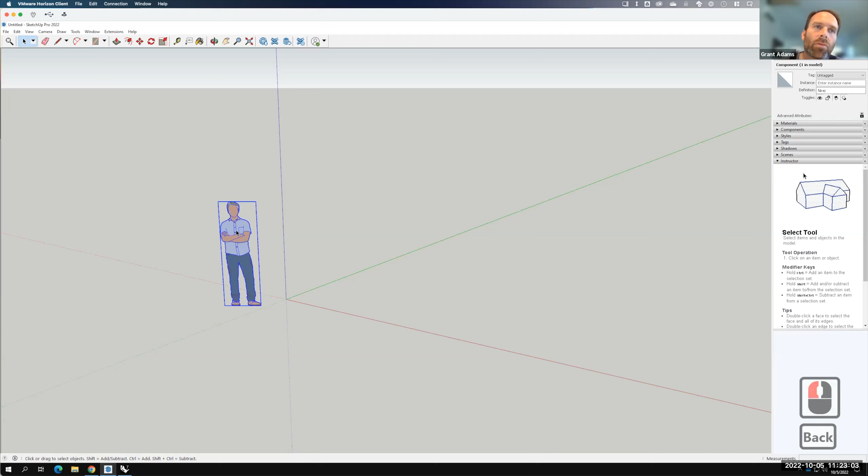In the meantime, I went ahead and opened up the SketchUp Pro app on the remote desktop. Here it is, and we're going to get our terrain information from SketchUp Pro. I'm going to go ahead and delete the little person here. Oh sorry, I have to right click and say erase to get rid of them. Then I'll go up to the file menu and choose geolocation, add location. We could get this information from a variety of sources, but for our purposes, we're getting it from SketchUp because it's an easy source and easy for us to get. But any kind of GIS data set we could use and do the same sort of thing with.

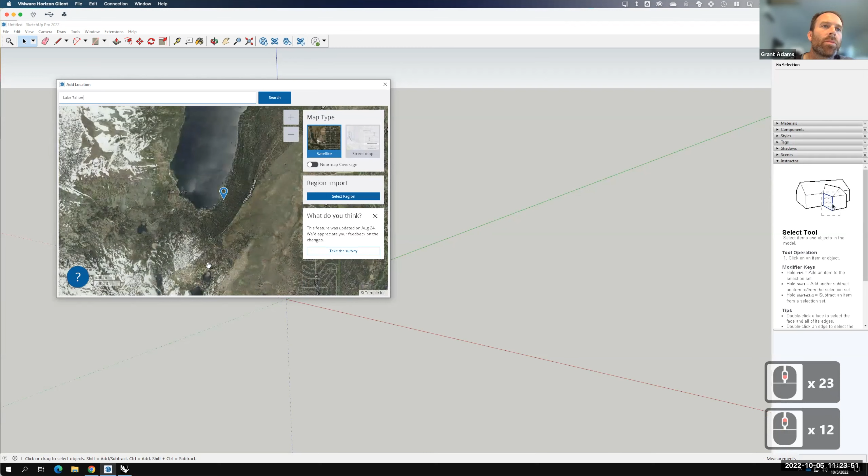So I'm going to go back to Lake Tahoe again. Let's zoom out a little bit. And that is definitely not Lake Tahoe. But let's try it again. There we go. So if we were to zoom in on a particular area, let's say that I like this area right here. At a certain zoom level, I can choose this select region button. When I select that region, it's going to let me select a piece of land. So let's say that I want to pick that piece of land.

I'm going to switch to this digital globe, then click on import. And there it is. To see it in SketchUp, I'll go to File, then Geolocation, Show Terrain, and that'll give me the piece of terrain. Sorry, I need to middle mouse to orbit here.

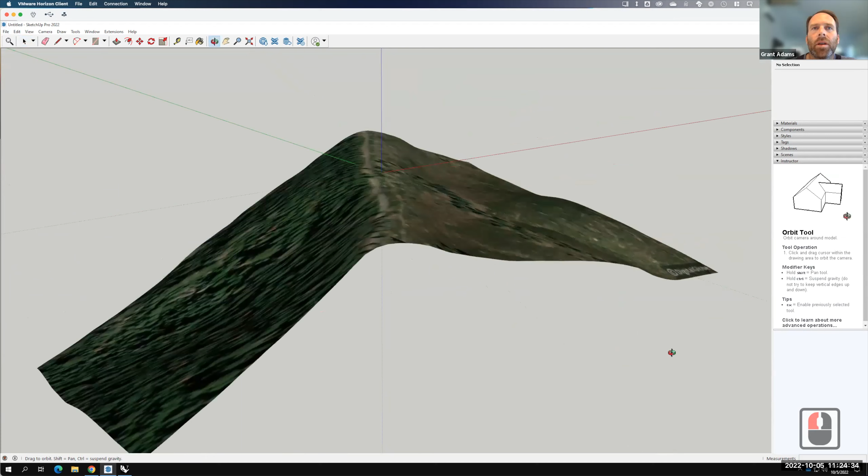So at this point, I want to save this into a Rhino compatible format. I'll go to File and then Save As, and I'm going to go backwards in SketchUp. I want to go back to about 2018. Then I'll give this a name and put it into our folder for today. There's Tahoe 3. Again, 2018 file. I'll go ahead and click on Save.

Why did you change to 2018? Because I'm not sure that Rhino, when you get to the new versions, it's possible that Rhino hasn't updated to read SketchUp 2022. I know that it reads 2018 and we're not losing any data by doing that, so I just back save it there.

We could, let's do it just as an experiment. We could save it as the most current version and see if it comes in. It's just a matter of which has been updated most recently. So we'll save this as its current version and see in Rhino. Maybe it's been updated, maybe Rhino's been updated. Part of it is we're working on the lab computer, so we're not always in the exact current version of a piece of software. So let me open a brand new Rhino file.

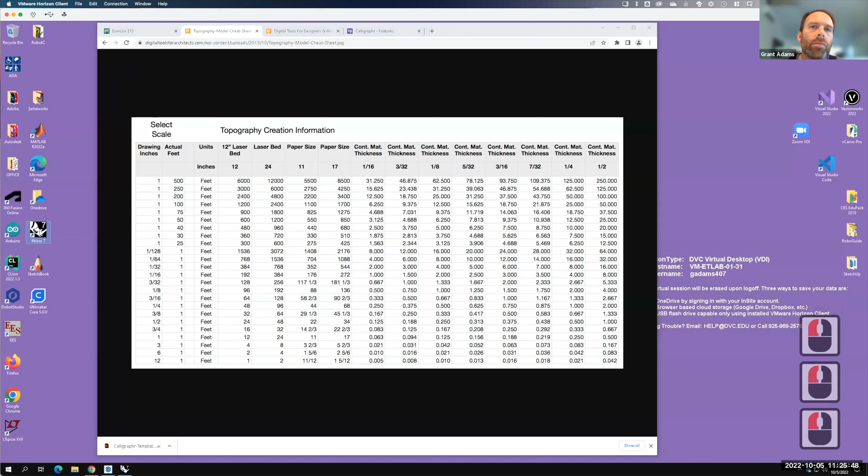Let's minimize SketchUp here. I'm going to go to new, and we're going to do a large object inches template. I'm choosing that because that matches the units that SketchUp was in. There we go. I'll go up to the file menu and choose file and then import.

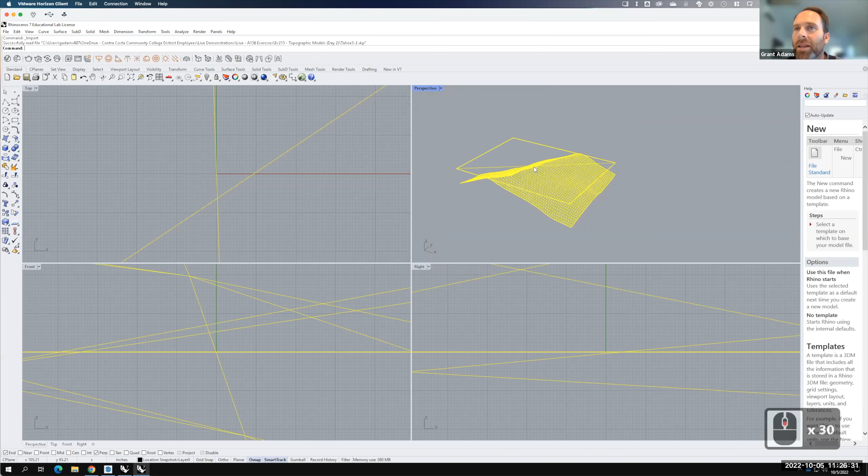And like I said, we're going to try out that Tahoe 3-2. This was the most current SketchUp file. Let's open it and see if it loads it. It loaded it. So I guess we can use just the generic SketchUp file, we don't have to back save it. That's good, that must mean the Rhino file has been updated fairly recently.

So like you guys can see, I'm moving a little bit faster today through these steps because we've already done it a couple times. So let's go ahead and switch ourselves into our shaded mode. There we are in our shaded mode, and I'm going to organize my layers.

So let's create a SketchUp layer. I'll call that SketchUp. And then I'm going to have an SK flat, and then another sublayer for SK terrain.

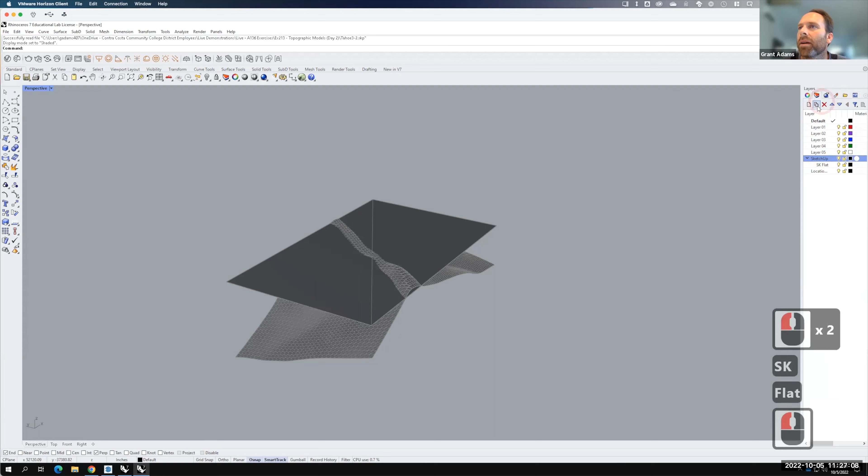I'll take the mesh file that's my terrain and put it on the SK terrain layer. I'll take the flat file and put it on the flat layer. That's just simply right-clicking on the, selecting the object, then right-clicking on the layer. That'll let me turn off the flat file and work just with this piece.

So at this point, I need to convert this mesh into a nice, clean NURBS surface. This is where those contours come in. I'm going to rename layer 1 here to be Contour X. So there's Contour X. Let's make it the active layer. I've moved my check mark down so it's listed as active.

In order to snap to the mesh, I need to turn on Vertex Snap. That'll let me snap to this end. And then we'll go ahead and use the contour command. I'll go up to curve, curve from objects, and then contour. There it is. I'll choose that point right there.

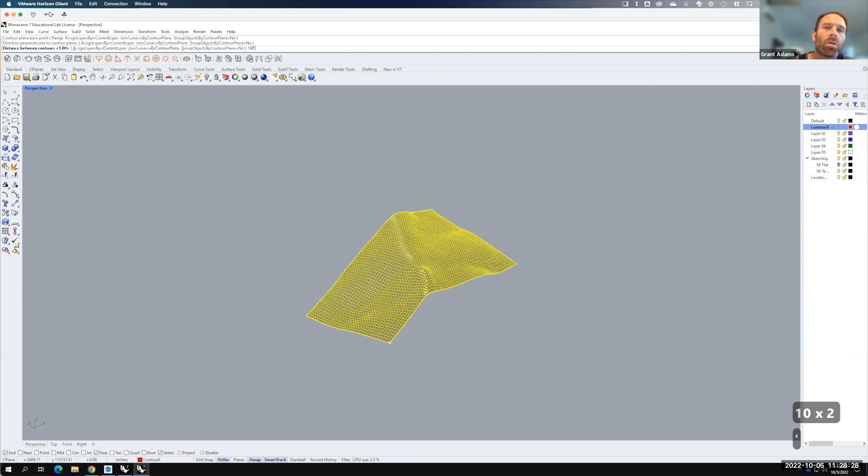And since this is Contour X, I'll turn on ortho and we'll go right in the X direction, again not snapping to anything. Then I need to guess what the distance should be. I always try 100 feet to start, but we'll see if that's too close together or too far apart. It's a little far apart. So let me undo here, and we'll do it again, contour, and let's try it at 50 feet.

It's close enough. Then I need to contour in the Y direction. So I'll double click on layer 2 here and rename that to Contour Y.

I'll make that the active layer, and I'm going to contour the mesh. Remember, if I were to contour the contour X's, if I went in and said contour...

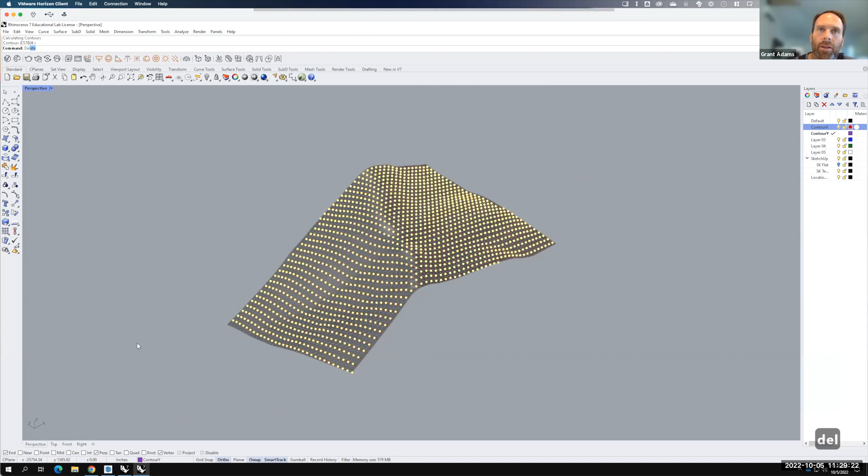When I did the contour, I get a bunch of points. Well, we're not interested in the points, so let me get rid of those. We'll come back. We want to make sure that I'm contouring the mesh right there.

I'll type contour, or do curve, curve from objects, contour. Pick that same point. We're going in the Y direction. We'll do our same distances. And there's my next set.

So at this point, I can turn off the SketchUp layers altogether, and I'm left with what will ultimately be a curved network. So it's a network of curves that I can convert into a surface.

As we've experienced before, the ends need to be trimmed to be nice and even. So we'll go in and we'll do some trimming. I'll select that, type trim, or go to edit and then trim. Get rid of all our lines right there.

Zoom in, make sure I got them all. Yep. And then let me get rid of this line. And then we'll trim this section.

And we want to make sure we got them all. Yep, we did. Hit enter to finish and escape. And then I'll go ahead and delete that section. We'll use this line and we will trim again.

There we go. Oops, I missed that last little piece. There we go. And then I want to delete that segment. And I'm left with this last piece over here on the right.

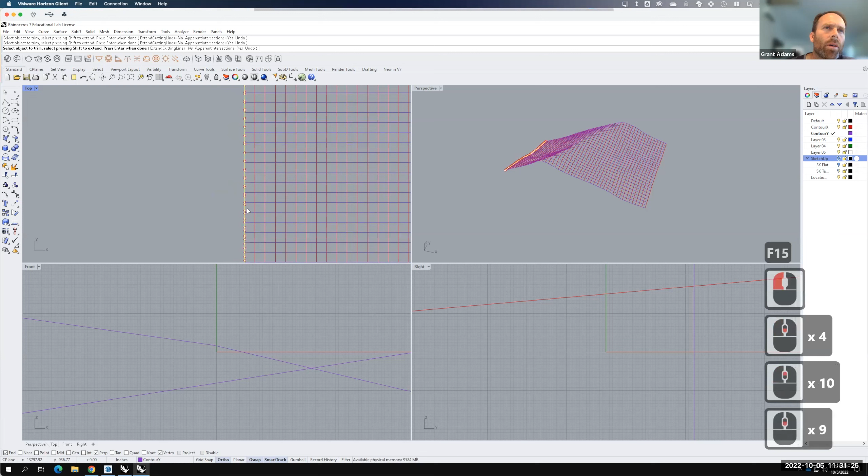All right, and then let's see if we can get them all this way. Missed a couple. And I'm pretty sure I got them all. Perfect. So I'll hit enter to finish.

And now I have a nice orthogonal grid that I can use for my curve network. So this is always a good place to save. So I'll go to File and then Save, and we'll make sure we're saving this.

This was Tahoe 3, so let's put it in its folder for today. We'll call this Tahoe 3. I'll go ahead and click on Save.

And there it is. Now it's time to convert this over into an actual NURBS surface. So let's use our layer 3 here. Let's call that one Terrain. We'll make it active. And then we're going to go ahead and do our curved network.

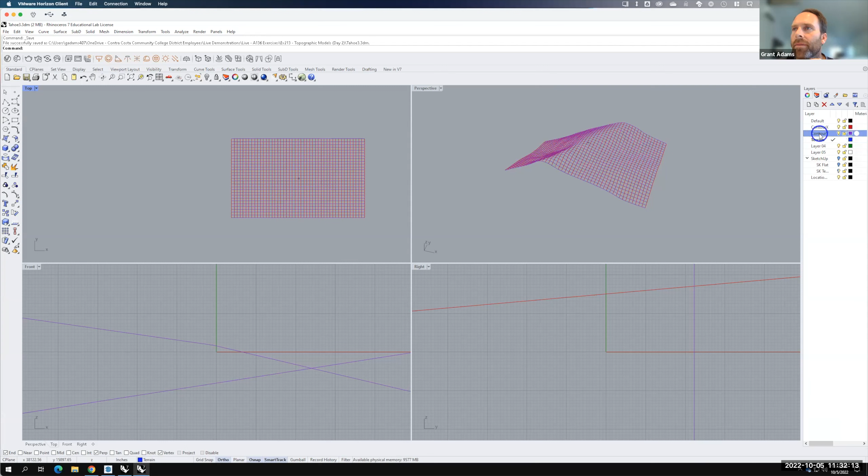So in this scenario, I'm going to, again, just for ease of getting it done during lecture live, select all of the contours in the Y direction, and add, by holding down the Shift key, the 2 contours at the ends, there and there. And then I'll go up to Surface, Curve Network, or I'll type in Network SRF into the command line.

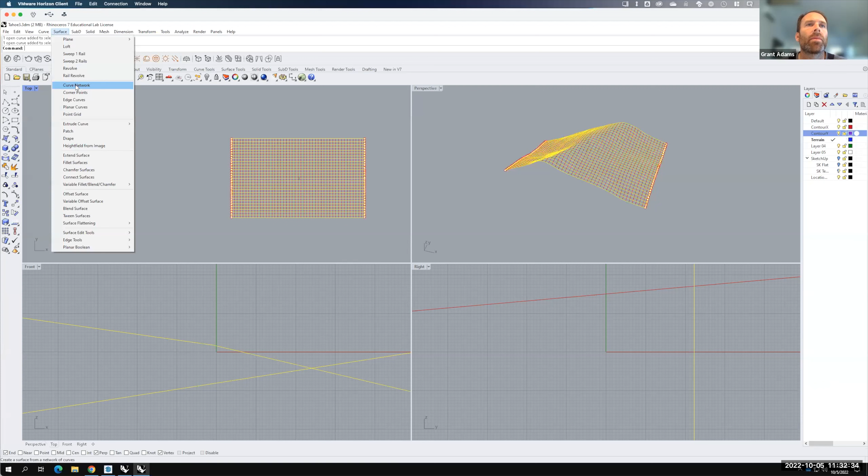And this is the patience game, so we have to be a little bit patient here. We'll wait for it to show up in all the views. And there we go. We'll go ahead and say OK, and we'll give it some time.

And even though this takes time, this is why I always do it live, so that you can see that this is normal.

So I think it's possible that it's done. Let's click off and see. Yep, it's done. You go ahead and click on the surface.

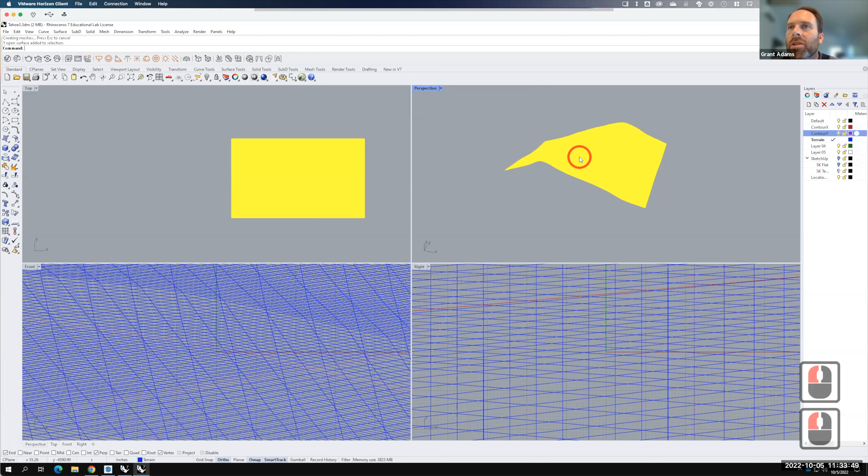And when I do that, we get the big yellow block. And now it's time for a rebuild of the surface. So with the surface selected, I'll go ahead and type in rebuild, or go to edit and then rebuild. And I'm going to rebuild this at 100 by 100.

And I'll go ahead and say OK. Now I have a really nice surface to start working with. It's reasonably smooth. We could turn off the contour X and Y, and now we can see that nice surface.

So that's perfect. So we have our NURBS surface, and it's now time to start thinking about it at a particular scale. So if you remember last class, and actually I'm going to save this while we have it done, I pulled up this cheat sheet that talks about creating a topography model.

And we're creating our model at 11 by 17. And so I have to understand what scale I want to create this model at. Now recognize that, of course, sometimes you're given a scale.

I want to see a model at 1 to 100, or I want to see a model at a 1/16 inch equals a foot. So you could pick a particular scale, or maybe it's dictated for you.

I believe this terrain's a little bit smaller, so it's probably going to be like the 1 to 200 feet. If that's the case, it would be 2,200 feet by 3,400 feet. That would be my rectangle. So let's give it a shot.

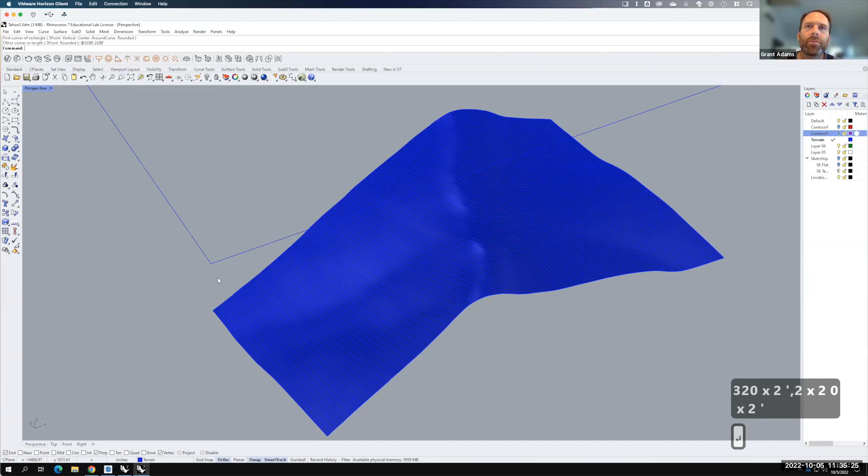So we'll create a rectangle at 3,200 feet, comma 2,200 feet. Enter, and there it is. If I look at this in the top view, we can see that, yeah, it's actually still too big. I picked a much smaller piece of terrain this time.

So let's delete that one. Let's go back to our file here, and let's do it at 1 to 50. Let's try that. This would be 850 by 550.

So we'll do a new rectangle at 850 feet, comma, sorry, I have to put the feet in, 850 feet, comma, 550 feet, enter. And there's that size. That size would work. So in this example, I can use this size.

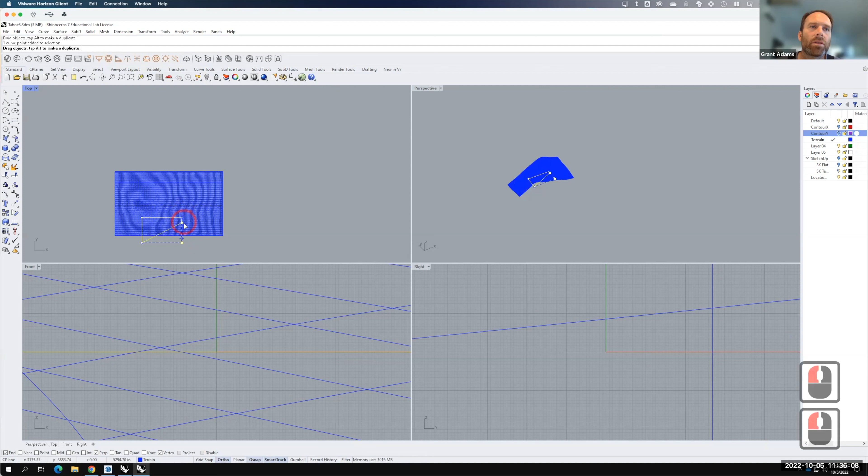And now I want to move this so that it's over the terrain. And as I'm starting to think about the terrain, I may want to switch this into shaded mode so I can kind of see where that ridge is and make sure that I'm falling on the ridge nicely. That looks pretty good. Now I need to have that rectangle that's flat projected onto this surface so that I can do a trim on the surface.

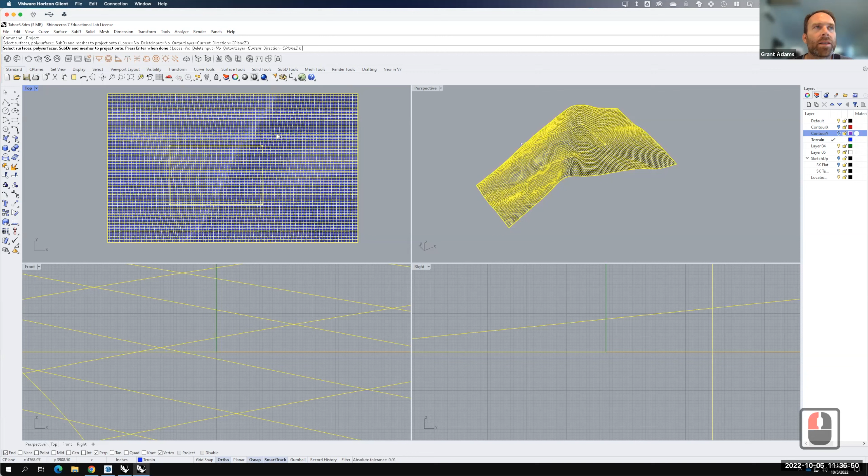So in the top view, and it's specifically in the top view, I'm going to select the curve, and then I'll do a curve from objects, project. It's going to ask me to select the polysurface or a surface to project onto. That would be my terrain right there. I'll press enter, and again I'm doing that in the top view, and it then creates the outline of my surface right there. So at this point we can go ahead and type trim, or go to edit and then trim, and we can get rid of the rest of the surface that we don't need.

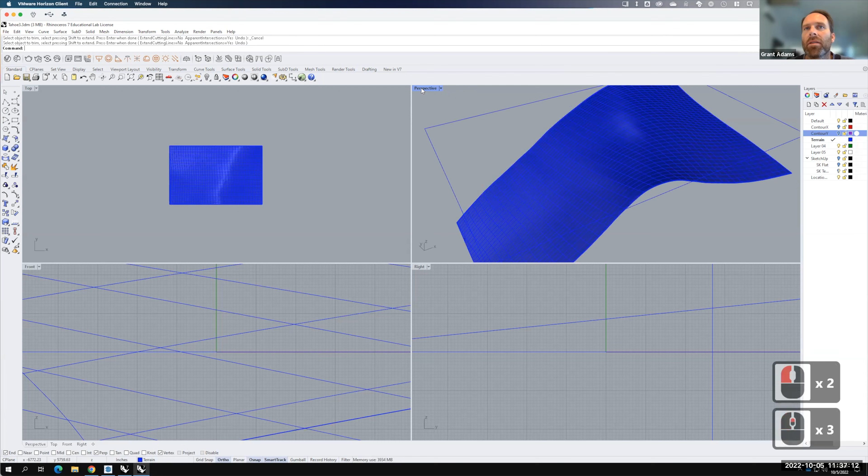Now, at 1 to 50 scale, this piece of terrain will end up being 17 inches by 11 inches. So it's a great piece of terrain there. It's actually pretty steep, so there's going to be a lot of steps on it. I'm glad I'm not actually doing all the steps on this in front of you today. And so now that we have this and it's scaled, let's save it.

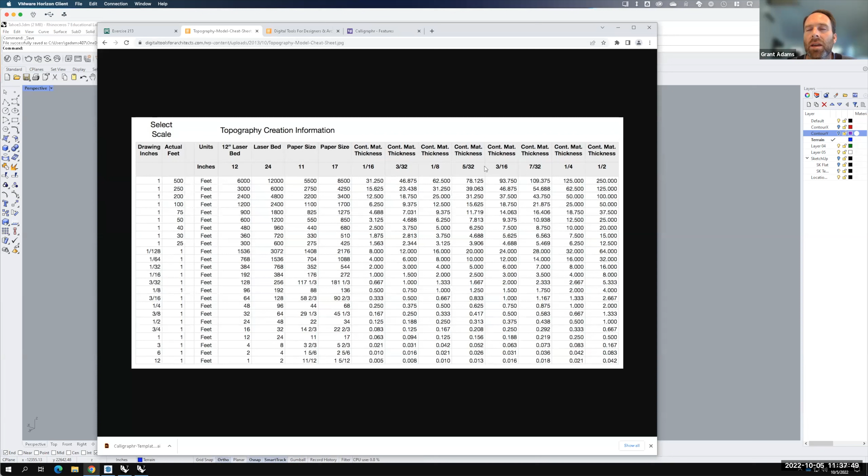But we have to start thinking about what intervals we're going to cut this up into pieces of cardboard. So we need to go back to that topography creation cheat sheet, this one, and we have to know the thickness of our material. So we've been using the 5/32 inch material. That's a standard cardboard size.

So at 5/32 of an inch, we're going to come to 1 to 50 scale. We'll come over here, and there it is at 5/32 of an inch. It's 7.813 feet. That's going to be 7.813.

So when I come here, I can go ahead and type in contour, enter. My base point is going to be down here at the bottom, but I need my contour to be going straight up and down in the Z direction. So let's back out in either the front or the right side view so that we're going straight up and down, and it's going to be 7.813 feet. I'll go ahead and hit enter.

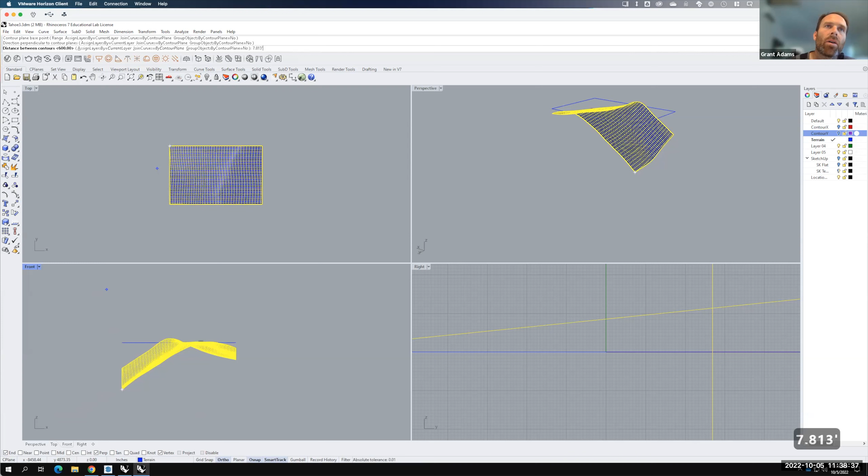And it will then divide up my piece of terrain. So like I said, this was a particularly steep piece of terrain, so there's going to be a lot of steps as part of it because it's a really steep piece of terrain.

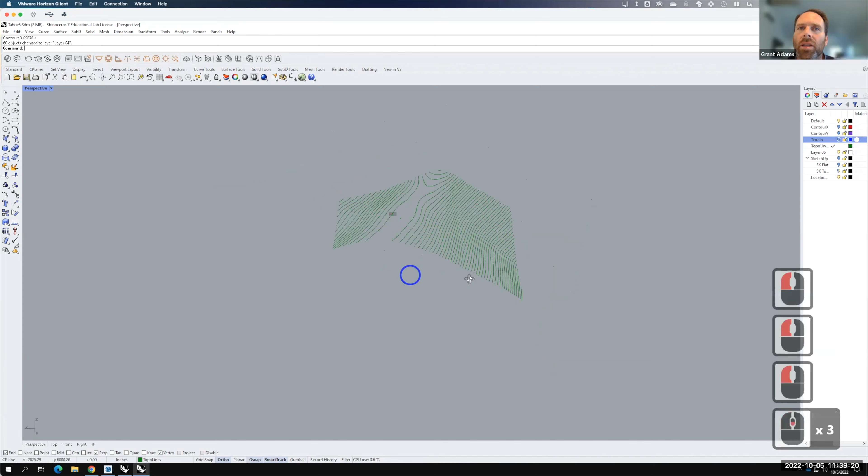So I have that established, and actually I should have put those on their own layer. Let's put them over here on layer 4. Let me change object layer. Let's rename layer 4, we'll call this contours. Let's call this topo lines. There we go. So I could actually make that active and turn off the terrain altogether, and we'd be left with just our topo lines. Now remember, that 7.813 feet is because we're at 1 to 50 scale.

So when we scale this down and eventually cut it out on a laser cutter or have the file, each one of these steps will be the thickness of a piece of cardboard. So now it's time to actually start drawing the sides. And as I did last class, there's two different methods for doing that. The first one would be to create a series of points. So I'll use the multiple points tool, and I'll create a point on the end of each one of these lines.

After I've created all those points, I'll select those points by typing SELPT to select point. It'll select all the points for me. I could also go through and hold shift and select them all, or draw a box and select them all - just different methods.

And then we'll do a rotate 3D. So I'm going to go to transform, rotate 3D. I'll use the bottom point, and I'll use my axes, in this case the y-axis, to fold all of these points down. And there they are.

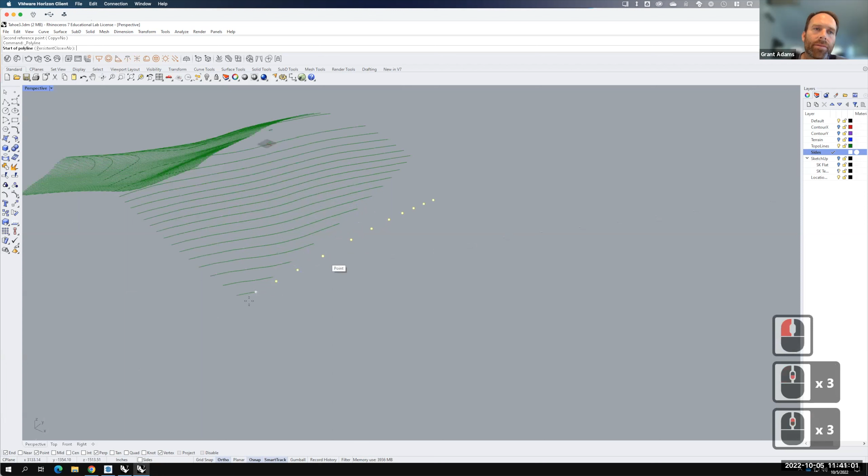Now I can go ahead on a new layer, we'll call this layer 5, sides. I can use my polyline tool and start to draw. I need to make sure I'm snapping to points here, and I can start to draw the steps. There's my first point. We'll come over - there's my snap to perpendicular. I do have my perpendicular snap on, so I'm using smart tracking to get those perpendicular lines. And then I'm drawing each one of these steps.

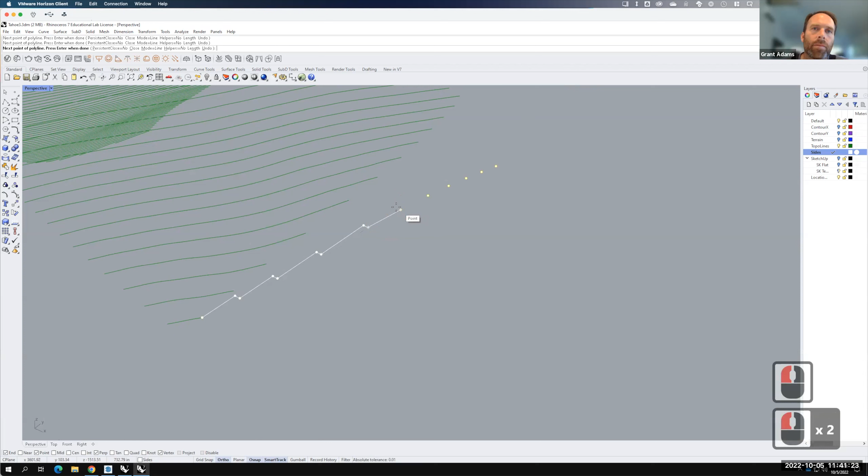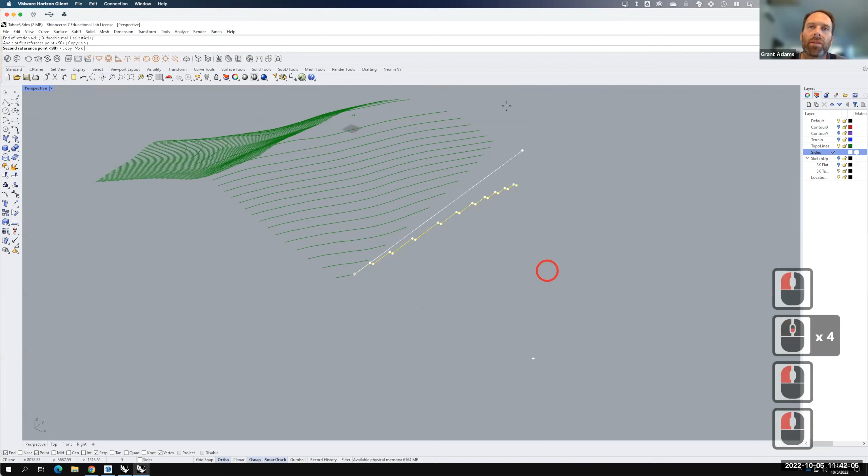There it is. And we'll do that rotate 3D again. So I'll go to transform and then rotate 3D. Start at the same base point, same axis of rotation, and we'll fold it from being flat to being up vertically. And now I have my steps vertical. So that's one way of doing it.

The other way of doing it, and I talked about this last time, is to change the drawing plane, the C-plane, which is represented by our little grid here, into being vertical so that you can actually draw just on the side as we're creating those steps.

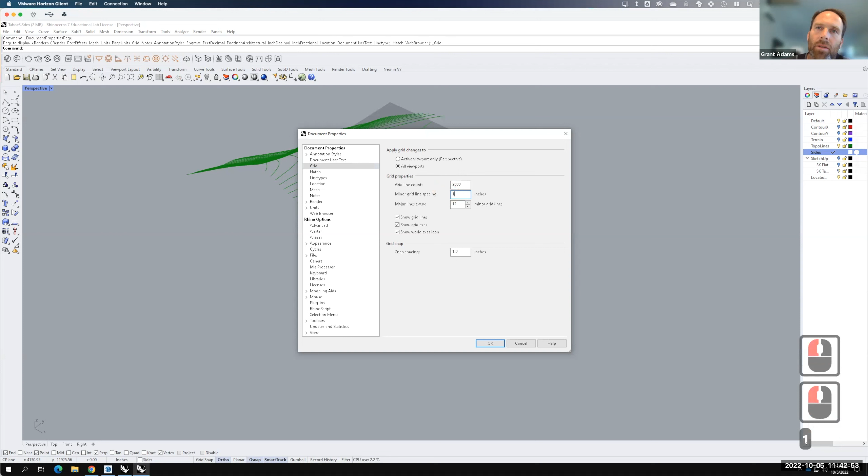So first thing I tend to do is make the grid much bigger. Let's go down here where it says Grid Snap. I'll right click on it and go to Settings. You can also access this by going to the Tools menu and then Options. Under Grid, I'm going to say we want 2,000 lines. We want our minor grids to be every 12 inches, so every foot. And we want our major grids every, let's say, 10 minor grids. And then we'll go ahead and say OK.

And when I do that, you can see that our grid just got a lot bigger. Now that it's so much bigger, we can use that to visualize our drawing plane. Right now it's flat. We're going to change that C-plane so it's on the side of this - actually, I'm going to do this side over here.

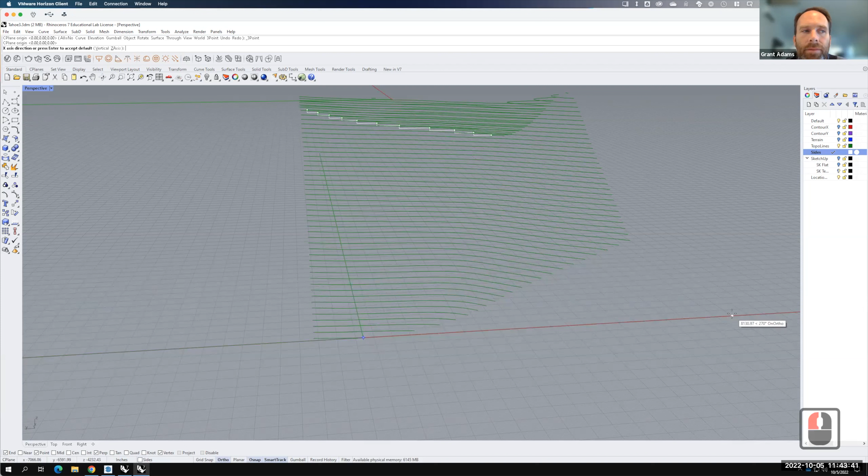So what I'll do is come up to the little triangle next to where it says perspective, and go to set C-plane 3 points. I'll pick the lowest most point right there, then pick what I want my x-axis to be - there it is. Now I want to be going straight up and down, but I can't do that in the perspective view, so I have to come back to one of these front or side views so I can go straight up and down. And now in the perspective view, my drawing plane is vertical along that side.

So the advantage here is that all I need to do is go ahead and start drawing. I'll start with my line, starting down here. We'll come over, we'll snap, we'll come up, and we'll draw it right in this plane.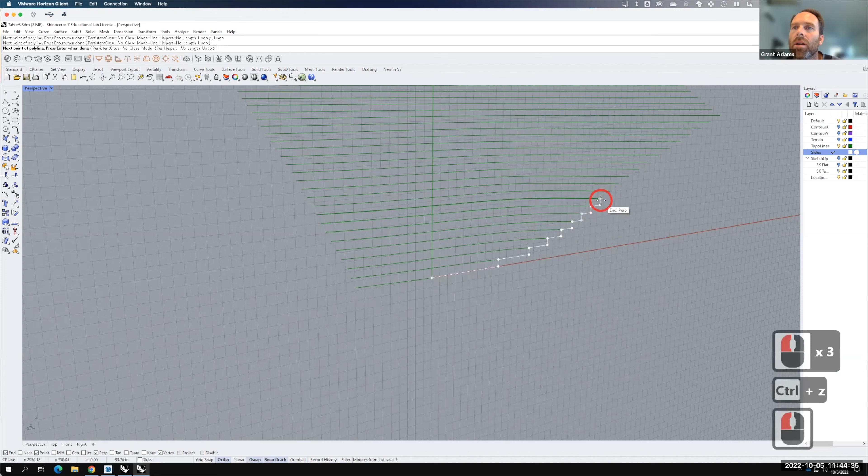This is definitely, in my opinion, an easier strategy for working on the sides because it doesn't involve all of the rotations that the other strategy does, but it can be a little bit harder to understand the mechanics of the fact that we're changing the drawing plane as we go forward.

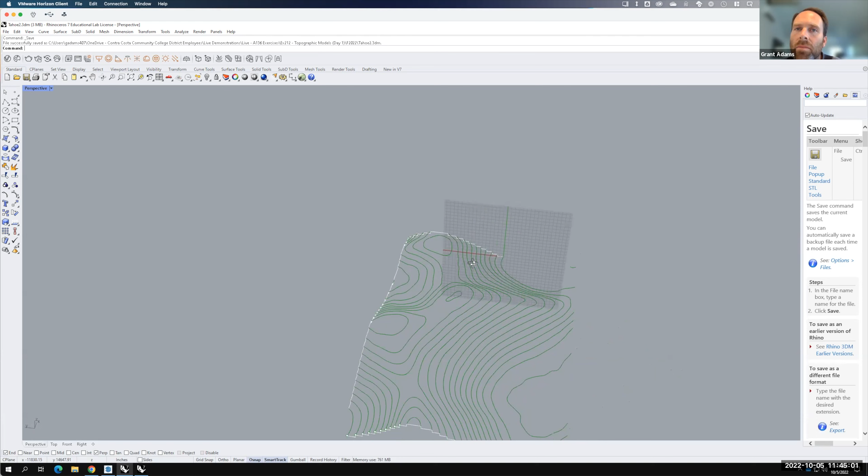So I have those steps drawn. At this point, I'm going to switch files and come back to the one I was working on last class, because I've already drawn a lot of the sides. In the interest of time, I think it's easier for me to continue working on this side. What I told you last time was to make sure you've drawn the sides, but not to worry about the corners so much.

So it looks like I still have one more side along the front here. This is a good opportunity to practice changing the CPlane. I'll go back up to my little triangle by perspective, go to set CPlane, and because I want to change it, I'm going to go back to world top first. It's always a good strategy to reset to world top, and then we'll create a new CPlane.

So I'll go to set CPlane, 3 points. I'll choose this point right here. We want to make sure, let me turn on ortho, we're perfectly in line along that axis. And then we want it to be going straight up and down. There it is.

And now we can see that plane that's along that edge. So let's go ahead and finish the steps on this side. A lot of this is manipulation, so you can kind of see what's happening here.

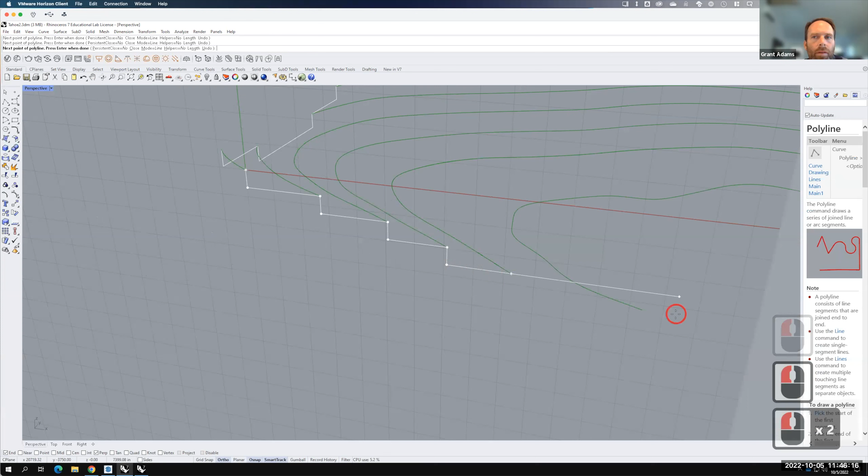So we'll start right there, and we'll start coming down there. Now, this is a point where I got to the bottom.

So when you find this happening, if I were to go straight across, that just doesn't seem right. I need a step here. So we need to go down by the distance of my contour interval.

So in that case, last class, if we jump back over here, it was a different scale. It was 1 to 500. So I come over here to the 78.125 inches, and we go ahead and we go down by 78.125 inches. There it is.

And I want to be going straight down. Then I'd come over and then go back up. So I have a step that comes down and over.

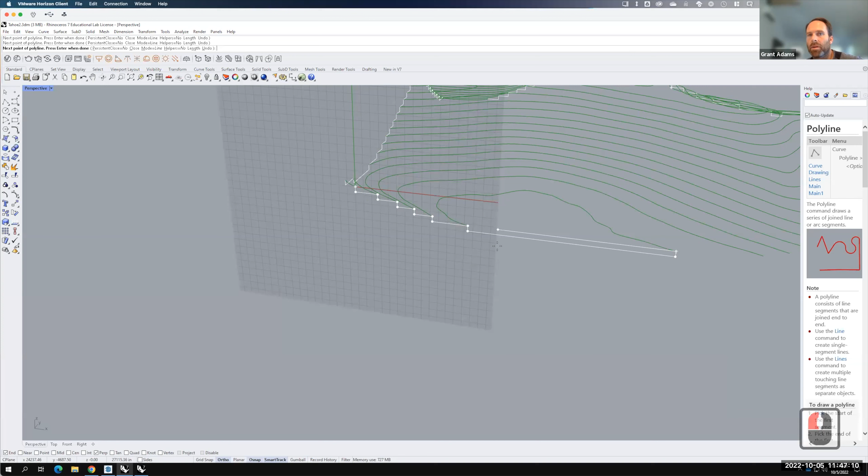So when you get to the bottom of one of these steps, you're always going down an extra step and then coming back up. When we reverse and we start coming up here to the top, we get to the point, we've done our step, there's our step, we come straight across, and then we're going to start going back down.

So it looks like I have a tiny little piece over here in the corner. So we'll do that, and I'll finish. So now I have the bulk of my sides done, and this is what I was asking you guys to do last class.

We need to think through, how do we finish off the corners? This is very much using the same kinds of principles that we talked about. So let's look at this corner first.

Well, in this corner, we get to kind of, we're going up along here, we're going up along here. So what we need to do is just create a line where these two pieces would intersect. They're at the same level. So we'll start by creating a line that's long, and then we'll come over, snap to this end, come over perpendicular, and those two then meet at that corner.

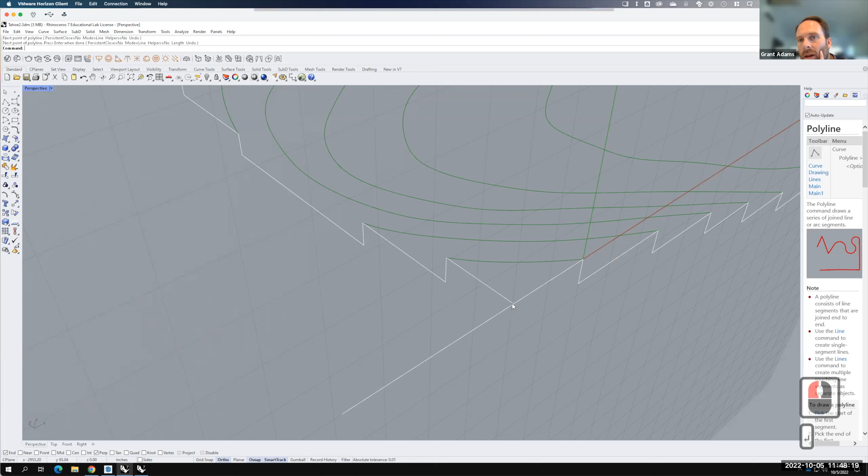I'll need to do a trim, and we use that as the cutting object. And there's our first corner. Right there. Let's look at our next corner.

We'll come around here. So this one, we're coming down on this side and we're coming down on this side. We get to a contour, so we need to go down again on both of these and then meet in the corner. So I'll start here and we'll go down by the 78.125 inches. There it is.

And then we need to come over, and I'll leave that one long. This point also needs to go down by 78.125 inches. Enter. There it is.

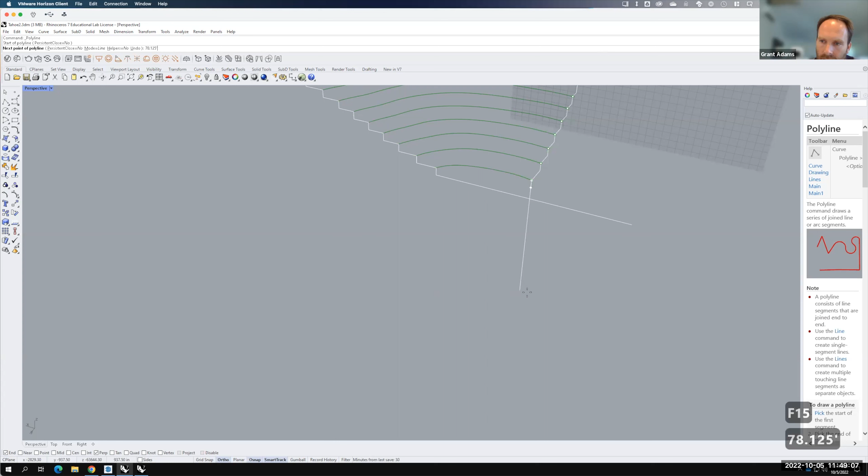And we'll come over to perpendicular. Oops, let me go straight down. There it is. And we'll come over until we hit perpendicular right there. Now we can trim it. So I'll select this piece, we'll type trim, and we'll trim that piece off.

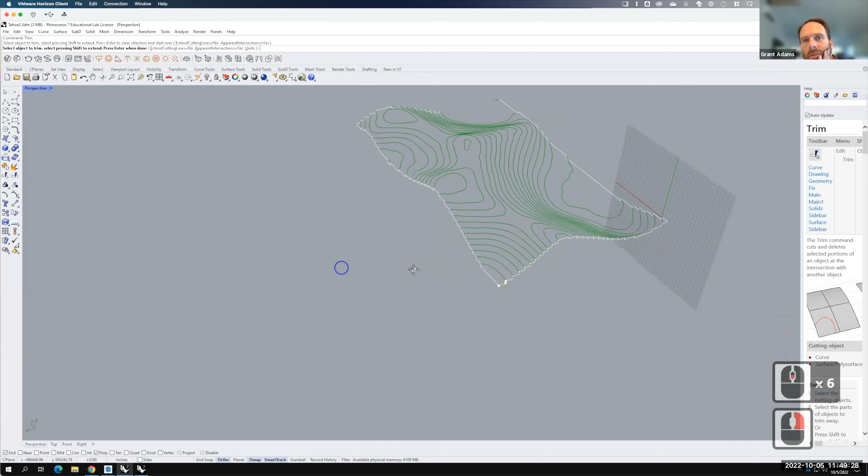So we've done the top corner here, we've done the bottom corner here. We come up and over. All of that looks good. We get to this corner.

So this corner has a little itty bitty contour in the corner, like a tiny one. And that tiny little one, in all honesty, if we were to laser cut this, this would just get burned up into smoke. So it's not really advantageous for us to do anything.

Technically speaking, it would go down and over. This would go down and over, and they'd meet at the corner. But because this is so small, we can safely just get rid of it, because it would burn up when we went to make the physical model.

So I'm going to go ahead and just hit the delete key or type delete. It'll go away. And then I can actually just join those two pieces together, and I can do that using a fillet. So I'll type in fillet. My radius here needs to be 0, so they come at a nice sharp corner. And I'll connect this and this at a point in space.

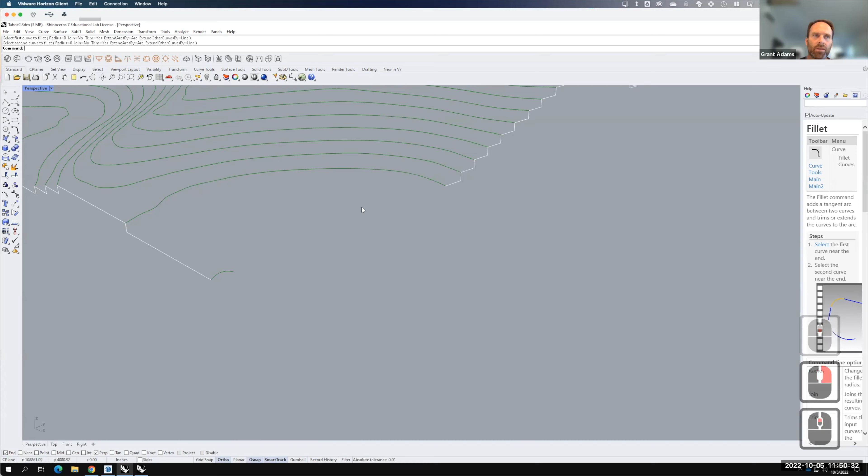And that's because that little piece was just too small. Okay, then we come over to this corner. Looks like I haven't finished in this corner. So I really need to reset my CPlane so it's in this plane so I can work on finishing it.

So I'll go to that little downward facing arrow. I'll go to Set CPlane World Top. And then we'll go back to my Set CPlane 3 points. We'll start right there at that point. There's our first axis. Our second axis is going to be going straight up and down. Remember, I'm not snapping to anything. And there it is.

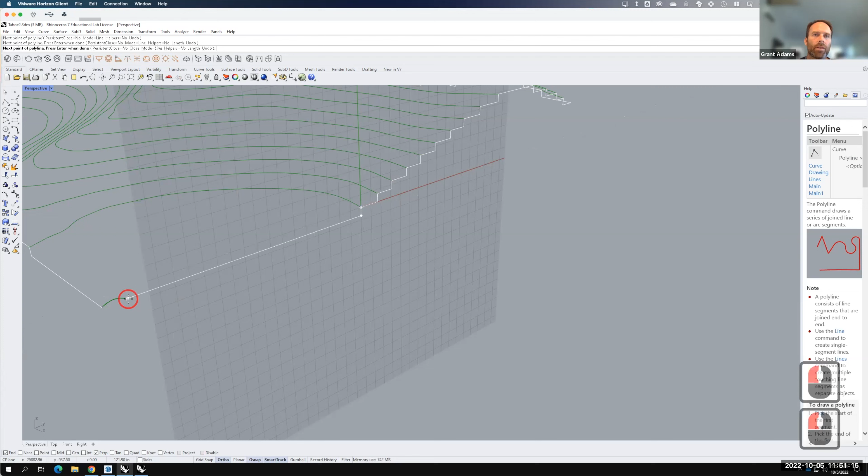Then we come over. And then we come back up, which is convenient because this line meets right at the corner. The alternative to that would be that we could go ahead and just delete that little piece, just like we did on the other side.

So we could take this, we could delete it, and then we could use a fillet to connect this piece and that piece with a radius of 0. That then allows us to get rid of that little piece. So we're making a few modifications, and that's just because in the scale of our model, it's not really going to make a big difference that we've done that.

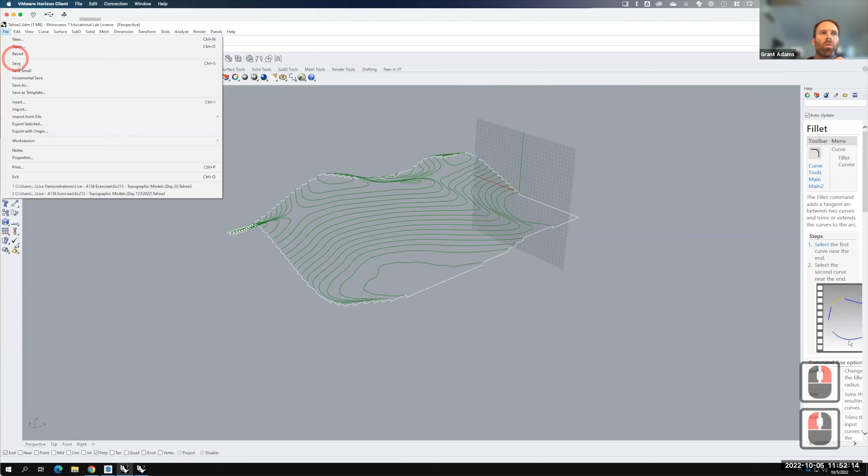So at this point, I have all of the corners done. I'm going to go do a file and then a save.

Perfect. And now that I have that done, I need to start thinking about what do the sides look like. So if I was going to create what the side looked like, I would need to go ahead and draw the side. So we already have the CPlane for this side. So let's go ahead and draw a side. So we'll start here and we'll come down.

We want it to be a little bit taller than, or a little bit longer than where our lowest point is. So that's our lowest point. We want to go down a little bit more. So we'll go down to about there. And then we'll draw over. And that is arbitrary. We're just deciding where it would go. And then we'll come back up. So this plus this plus that is going to be a side.

So let's go ahead and join it together. That's our first side.

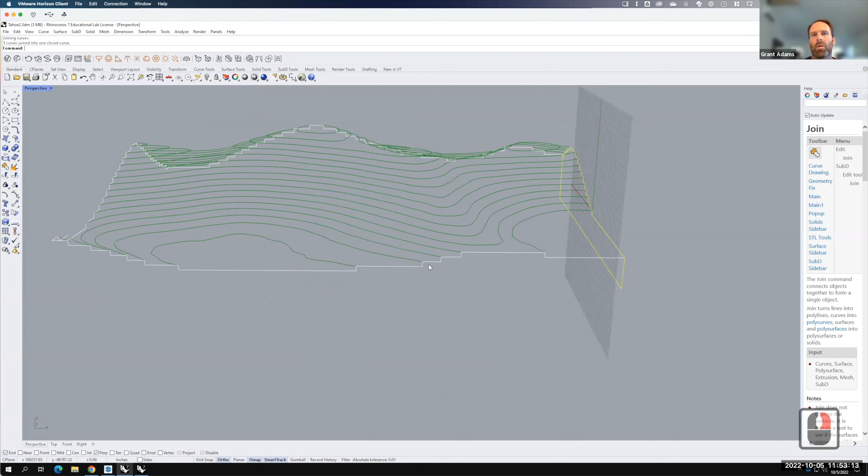Now we want to do this next side. So let's reset our CPlane. I'll go here. I'll go to Set CPlane World Top. So we reset it. Then we'll go here. We'll go to Set CPlane 3 points. We'll start right here. And then we want to go vertical.

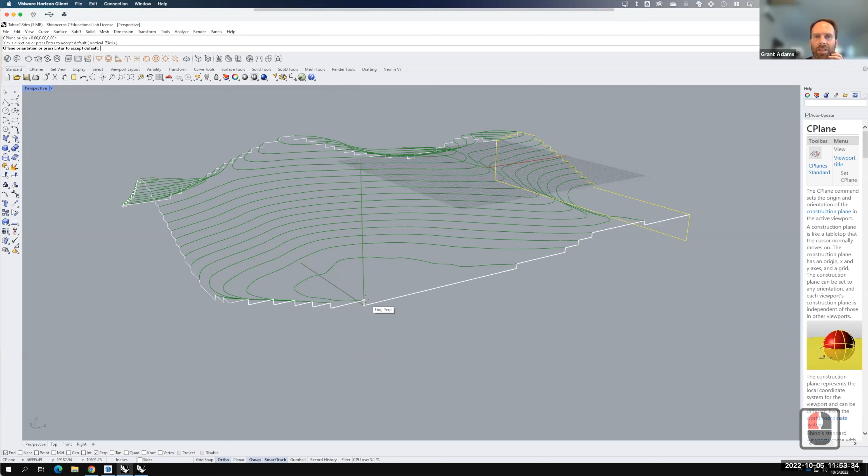Now, the advantage here is I can actually snap to that little step because I already have it. And so once again, I'll come back to my polyline. I'll start at this corner. I'll go down to where my height was before. I'll come over. I'll reference that point right there till it's perpendicular. There it is. And we'll come back up and join right there. I'll hit enter.

So this plus that is now the next side. So let's go ahead and type join. So I have a side here. I have a side here. We need to create a side at the back end here.

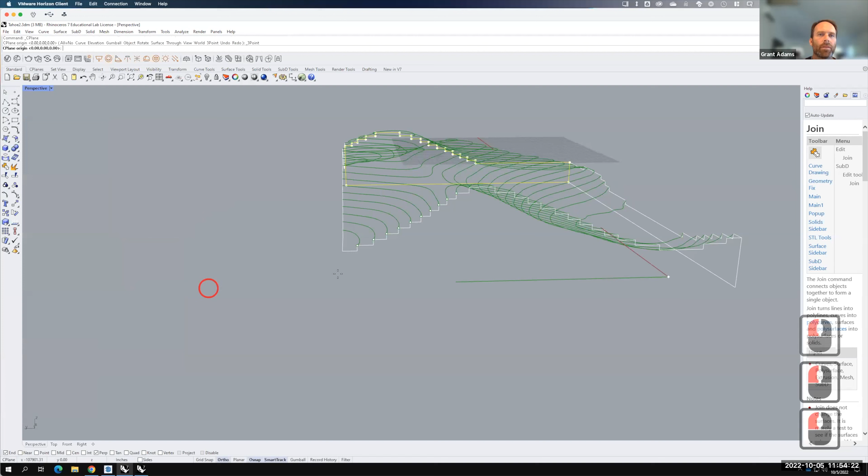So I'll come back. I'll go to Set CPlane World Top. We'll go back here to Set CPlane 3 points. We'll go out, and then we'll go straight up and down. There it is. And same process. I'll come over here to the corner. I'll draw a line down. We'll draw a line over till it meets this point.

There it is, and back up. And then I'll take this line plus that step, plus that step, plus that step, plus that piece, and we'll go ahead and join that. So now I have 3 of the sides. That leaves me with the last side. Well, I actually have all I need to create that last side. I don't have to change the CPlane again. I can merely start and trace down to that point, come over to that point and back up. That gives me that piece of the side. And then I'll hold down Shift and select that part, and that part. And then I'll go ahead and type join. So I have 4 sides that are all closed curves, which is exactly what I need.

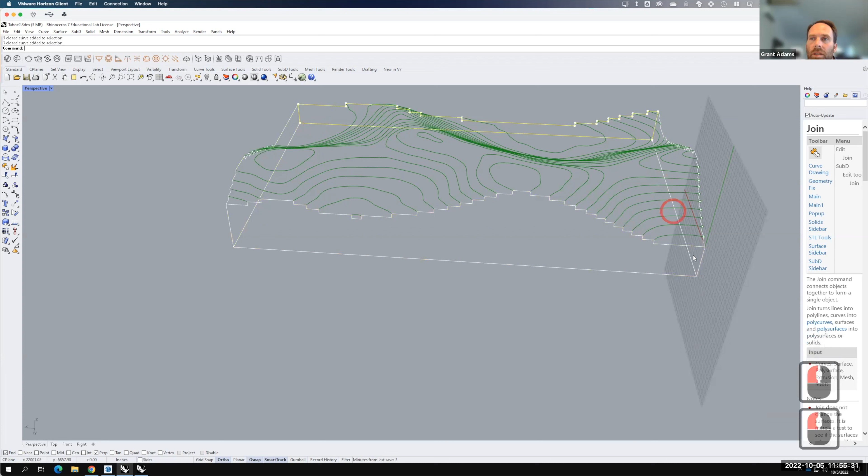So I've created all the steps. I have all of the contours. Now it's time to start thinking about how does this model end up being something that we can actually cut out. So let's go ahead and reset the CPlane. I'll go back to set CPlane. We'll go to world top. Here we go. And so now I want to think about how do these become a flat object?

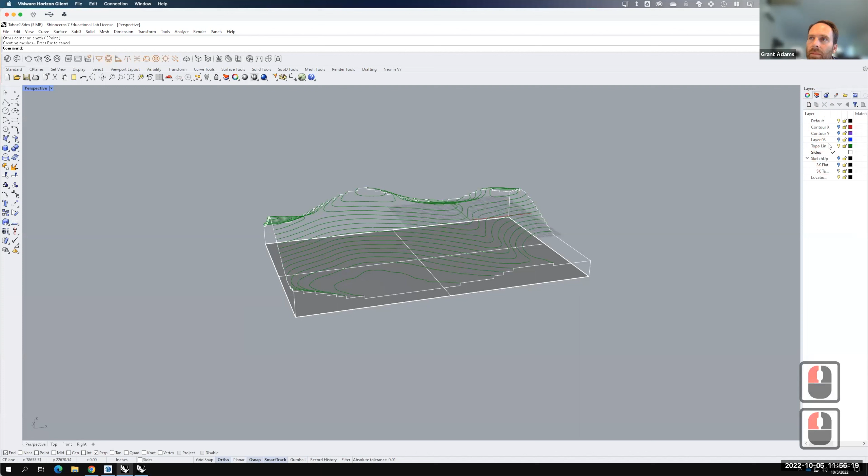Well, first off, we need to take all of the contours and we need to get them flat. So we'll create a surface at the bottom here. There's a surface, and we'll use that to project all of those lines. So I'll go over to my layers and I'm going to select the topo lines. I'm going to switch my view into the top view. Remember, it has to be in the top view. And for the ease of seeing this, I'll go back to a wireframe mode. There it is. And I'm going to type project, or go to curve from objects, project. And I'm going to project those flat onto this surface.

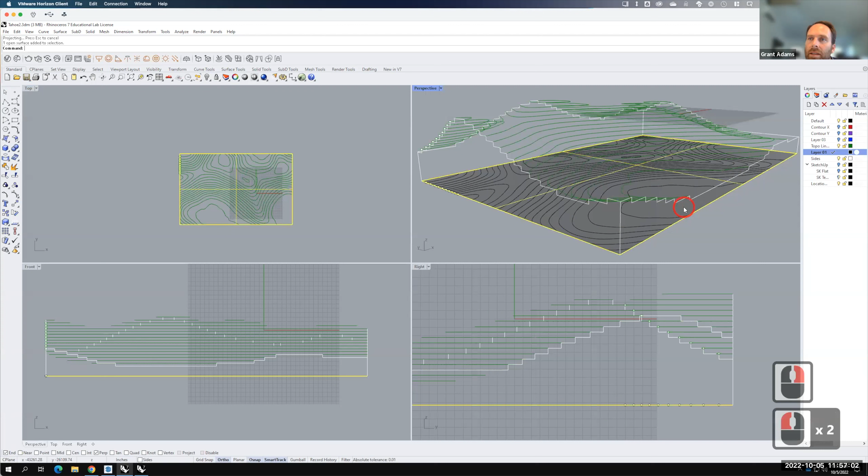Realistically, I should have my own layer for this. So let's go ahead and create a new layer. I'll make that active, and then we'll go ahead and hit enter. That then takes all of my topo lines and it puts them flat on the ground. So at this point, we can go ahead and delete this surface. We don't need that anymore. We'll type delete, there it is. And we can turn off the topo lines layer because we don't need those. And let's rename this layer 1 into laser cut. And then let's keep working with it.

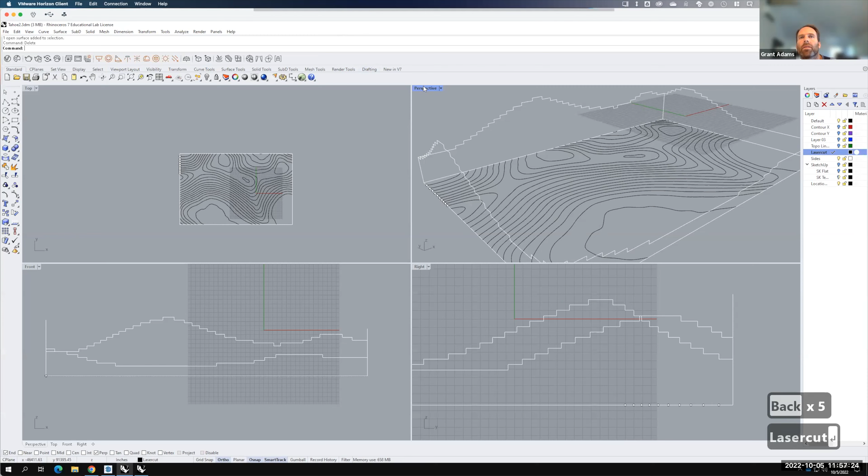So in order to cut these, we're going to have to fold the sides down. So I'll take each side and I'll use a rotate 3D. Our axis of rotation will be along the bottom here. And we'll take it from being vertical to being flat. Repeat the process, I'll right click to repeat. Our axis of rotation is right down there at the bottom. And we'll fold that flat. We'll come back to this piece. I'll right click to repeat our axis of rotation, and we'll fold that flat.

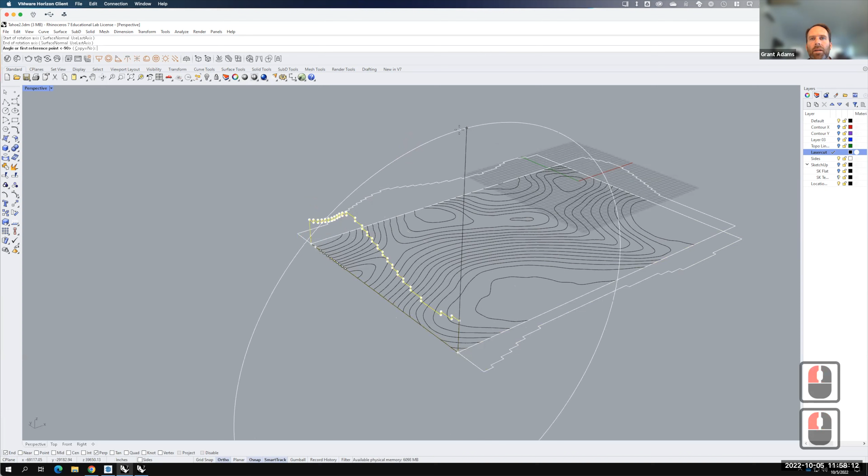Last one is right here. We'll right click to repeat. My axis of rotation is right there, and we'll fold that piece flat. So I've now, kind of like when you have a cube and you unfold it, I've essentially done that. I have my contours and I have my sides and they've all been folded flat. We do want to make sure that the folds that go down are always the same, so they're all going the same direction. They're all folding out. Okay, so I have those pieces.

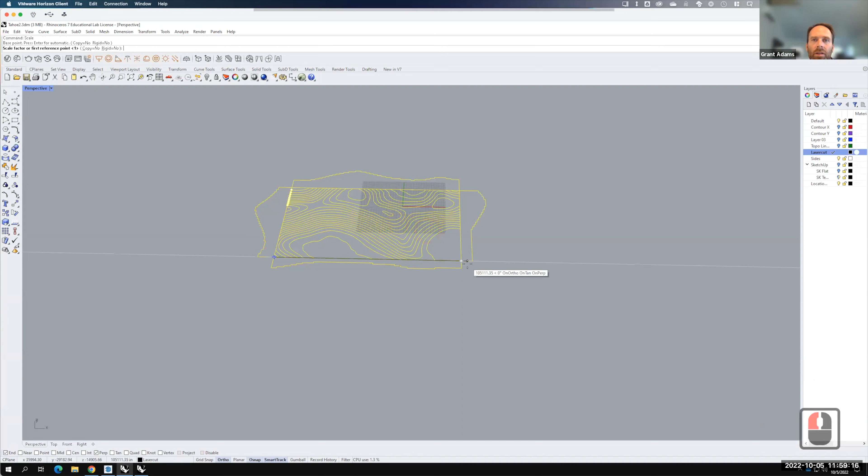Now that I have those pieces, let's go ahead and take them all and put them on the laser cut layer. So I'll right click and say change object layer. And now that I've done that, we need to actually scale it down to the size that we're going to laser cut. So I'll take my objects. Remember, we knew that this was going to be at, in this case, 1 to 500 scale, but we also knew that the distance from here to here would be 17 inches. So we can actually do a scale, and this is a full regular scale, so it's not like a scale 2D or something like that. It's just scale. And we'll say that the distance from here to there should actually be 17 inches. We'll put the quotation mark in and hit enter.

I think it's really, really small, so let's zoom selected on it. And let's go ahead and move this point to be at 0, 0. So we'll go 0, 0, and then zoom selected. So now this is at the scale of the physical model that we're going to be creating, rather than at full scale, which it just was. So we've shrunk that down. And now we have to think about actually laser cutting it. So when we start to do that, we're going to need 2 sublayers. So we have a laser cut layer. We'll create a sublayer for cut. And then on the laser cut layer here, we'll create another sublayer, and this is going to be called engrave.

And we're going to use those to our advantage. Because of how the laser cutter works, we need to change the color of the layer for the cut. Right now it's set at black, so we need to change it to red, and we'll say OK. For the engrave, we're going to change the color to blue, and we'll say OK.

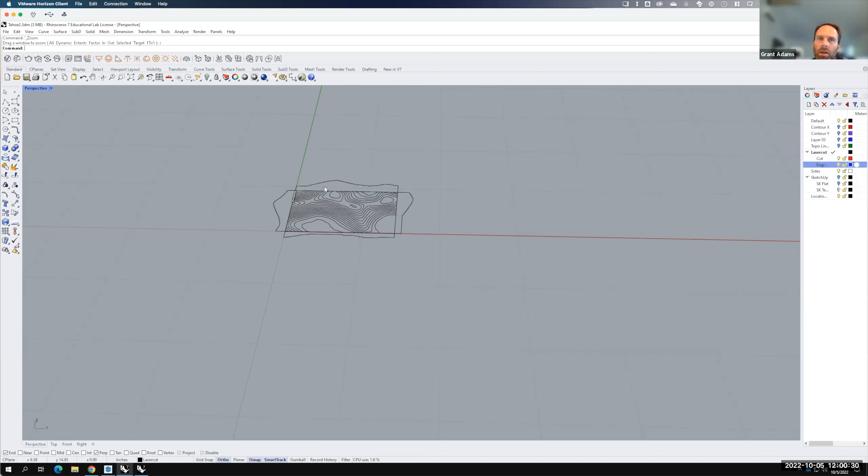So I have a laser cut layer: a red layer for cut, and a blue layer for engrave. All of these sides are going to be cut out, so we can change those right now onto the cut layer. We'll right click and change object layer, and those are now on the cut layer.

Furthermore, we need to be able to place them on the laser cutter bed, so we need some guides for ourselves. The laser cutter bed is a rectangle, 12 inches by 24 inches. I'm going to create a few of those. I'll say 24 inches, comma, 12 inches — it's 12 by 24. So that's the laser cutter bed.

We'll copy it again. You may need 3 or 4, depending on the size of your topo. I'm pretty sure I can fit this on just 3 sheets.

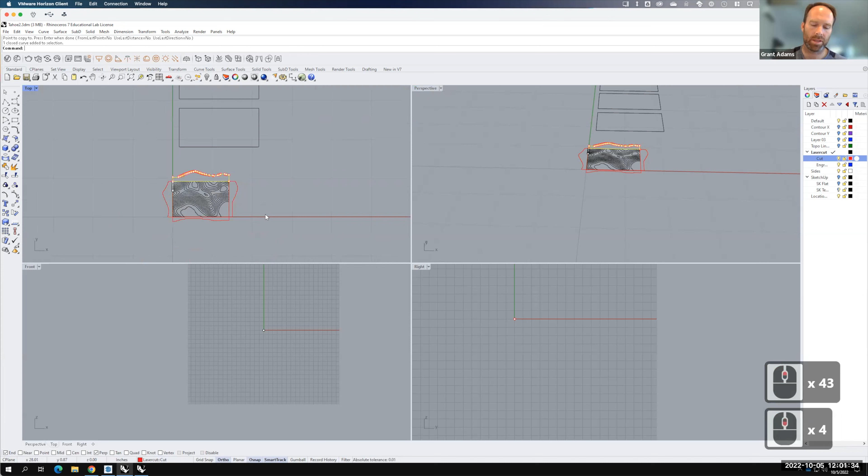At this point, I could start moving these objects onto those rectangles. So we could zoom in here on the top view — sometimes it's easier to do it that way. I could type move and say, OK, this one will fit on this. Let's move it over a little bit. There it is. Let's take this one, and we can move it over here.

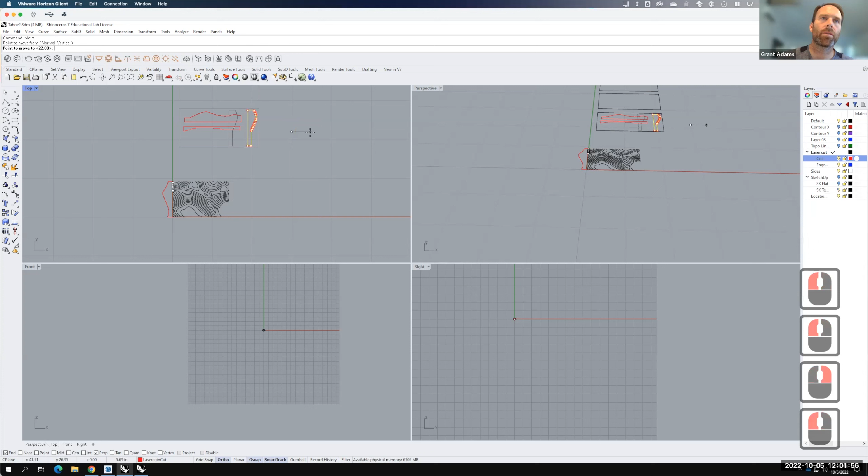Like that. This one, for example, I can move it up, and we can move it over. Now it doesn't really matter — I could try to fit all of these on. What I don't want is anything to overlap. So let's take this one, let's move it like that. I can rotate these if I want, but I think I can make them fit.

So let's continue moving these around just a little bit. Not bad. OK, they all fit — so that's on one sheet. That would cut out just the sides for us.

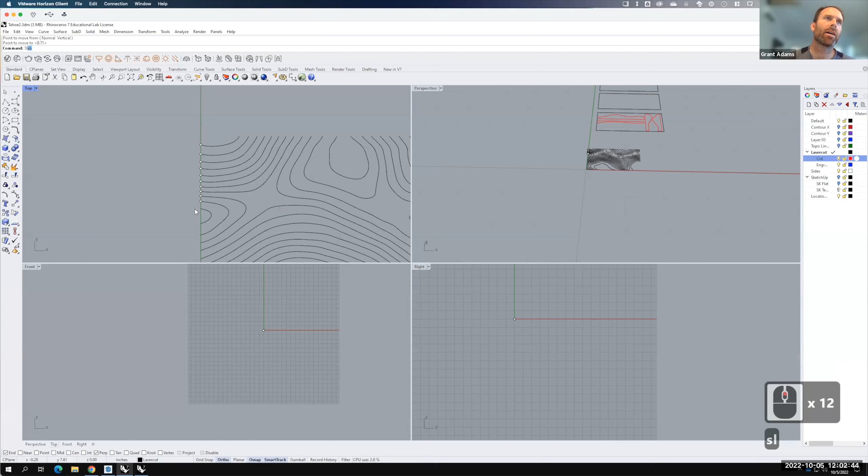Now it comes down to this part. I don't need these points anymore. Let me type SELPT to select points, and then I'll go ahead and delete those.

OK, so I have the topo lines. I'm obviously going to have to cut around the topo lines, so let's draw a rectangle around them. We'll start there and end right there, because we're going to have to cut those out. That should be on the cut layer, like that — so we know we're going to cut that out.

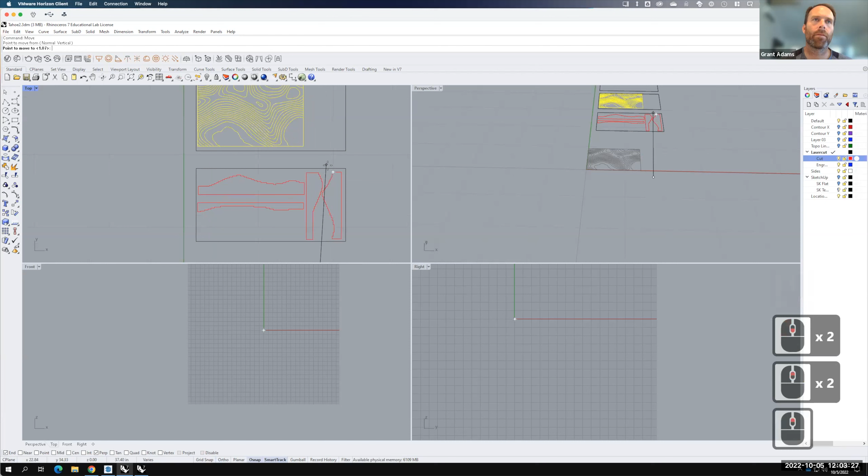Furthermore, I could take this and move it up onto the laser cutter, one of these. Let me turn off ortho here for a second, stop snapping to things, and disable my snaps. And there it is. I could also copy it, because I'm going to need a second copy.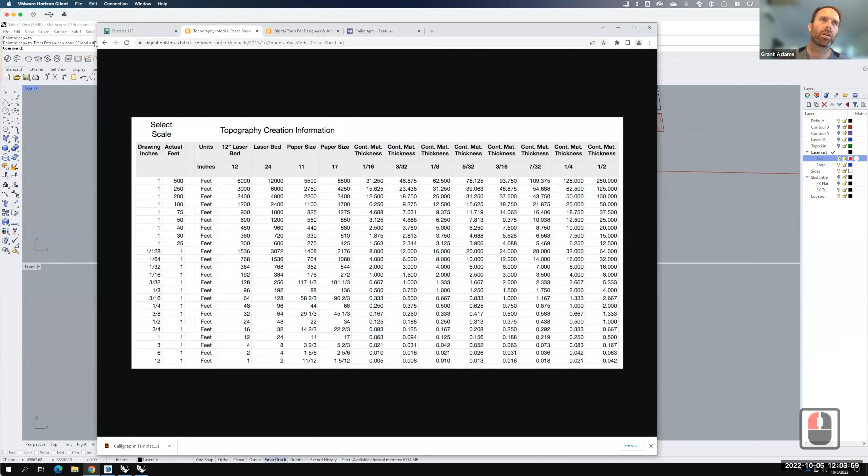So we'll put one more right up here. And you say, well, wait a minute, why do I need 2 copies? Well, if we were to take this and cut every one of these little pieces out, we'd have no way of aligning them and making sure they glue together. If you remember back to the video I had shared here, maybe some of you watched it.

I thought it's on the handout. Let's see here — right, this one. I don't want it to play audio, so let's mute that for a second. When we come in here, all right, let me make that bigger for a second.

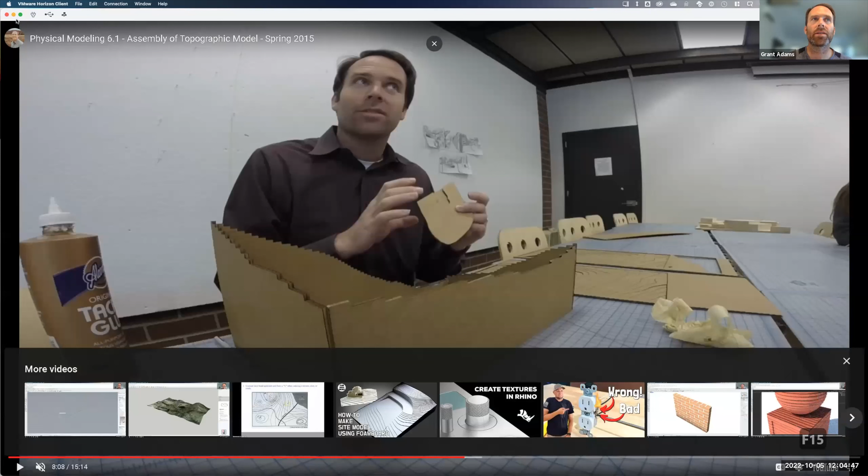Okay, so there's the sides that we just saw. But when we get to the actual pieces that are stacking here, I have these individual pieces — see if I can see it right there — where we want to be able to stack them together. So one piece needs to overlap the next piece. That's where these come into play. Let me escape out of that for a second. We're creating overlaps.

We'll do that by starting at a particular point and selecting every other line. So on this one, I'll select the first point, hold down Shift, and work my way up the contour, selecting every other line.

Okay, when you get to a place where that one would continue around, let's see, that would be selected, and then we'd work our way up here. Oops, that was wrong. And of course, I'm on a Mac, so I can't use the Control key to deselect. Yep, it's not going to work for me. Let me start again, sorry.

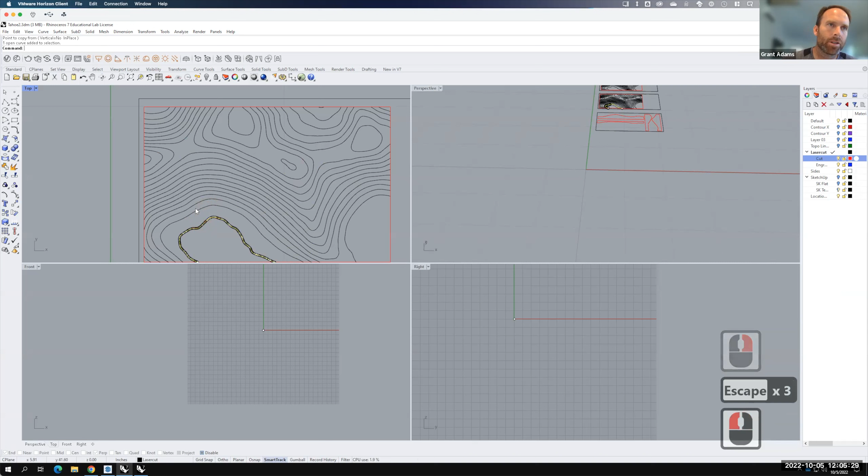There, hold down Shift. Remote desktop issues.

Okay, good. We'll pick that one, we'll pick that one. And we'll pick that one, that one. And that one. So you can see I'm kind of working this. Let's see, this would be not selected. Okay, so I have them. Oh, I have to do these too. Let me pick that one.

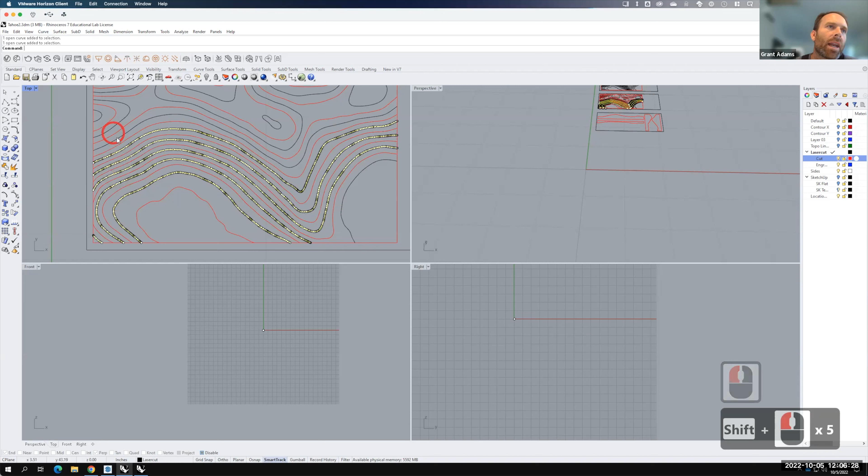I'll take all of those and put those on the cut layer. Remember, it's every other one. I'll right click and say change object layer. Those are now all on the cut layer. The remaining ones all need to be on the engrave layer. Engrave means it'll put a small line on it to help us identify and line up these pieces. So we'll select the rest.

And those will all be put on the engrave layer, like that. So I end up with red and blue lines with a red border. Now I do the exact opposite on this one so it's kind of like shuffling a deck of cards. This time we'll start with blue here because it's red down here, and we'll alternate.

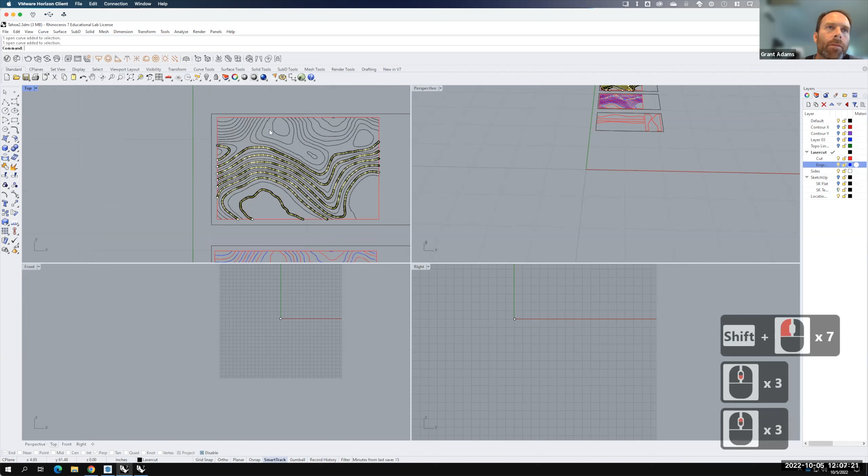So this is going to be all engrave ones. Let me go through and pick these. All right, that's correct. We'll come over to the engrave layer, right click and change object layer. Compared to down here, it's the exact opposite, so whatever's red on this one should be blue on this one and vice versa.

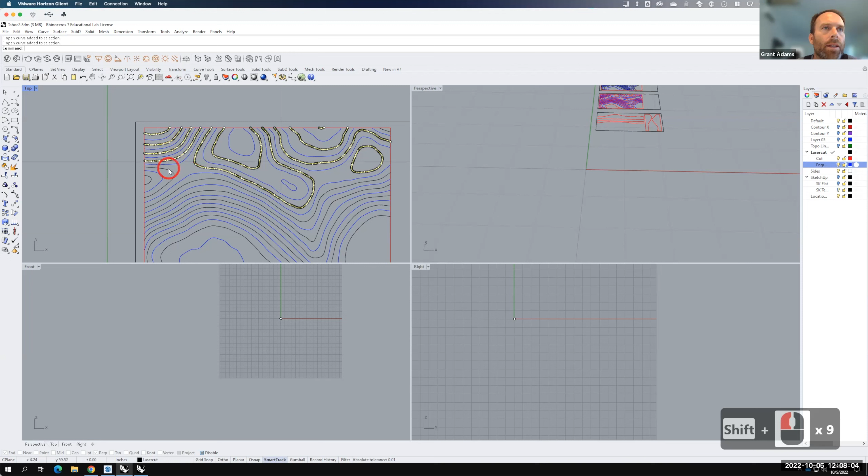So let me select the remainder here. These are all going to be red. And so when you guys have time, I would encourage you to watch that assembly video because it'll help clarify what's going on. There we go. I'll right click on the cut layer and say change object layer.

And there it is. So what I end up with here is two exactly the same cutouts, but with alternating colors. So anything that's red down here is blue up here and vice versa. And it looks like I missed this, so this one should have been red. There you go. Sometimes we have those little mistakes.

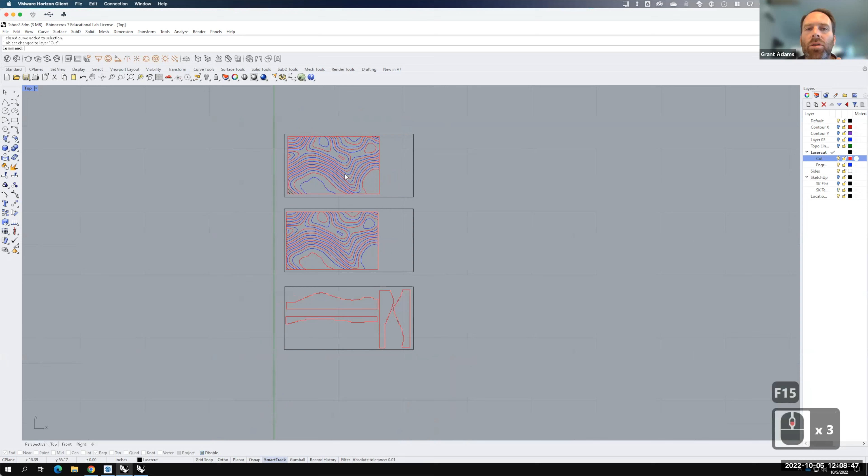Okay, so I have those set up. We're ready to do the laser cut if we were going to do it. The only thing we haven't taken into account yet is the thickness of the cardboard. Because of that thickness, if we were really to glue the sides together, there's going to be an overlap in the cardboard, and you can see it, though I may not have done it in this video.

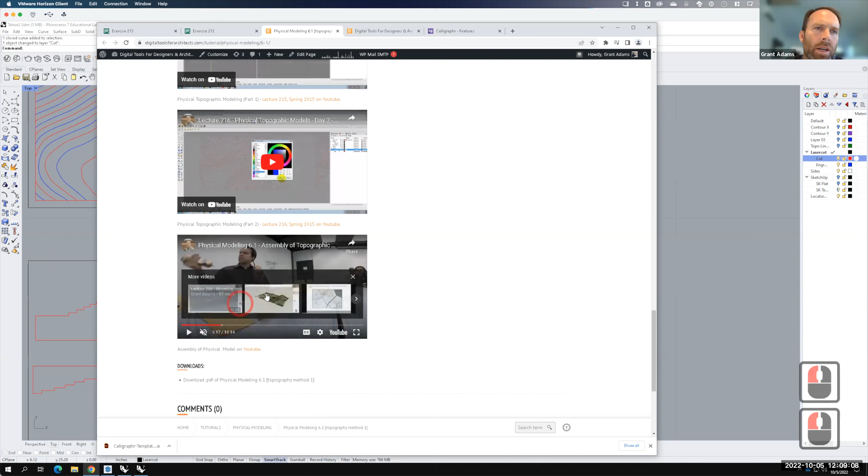You can see it kind of in the beginning of this video as I'm starting to glue those two sides together. We want to take a little bit off each side, so we just want to make sure we're either picking the long sides or the short sides, and then we can come in here and take the thickness of the cardboard off.

So it would be 5/32 of an inch. I'll do it on the short sides. I'll start there. We'll come over here by 5/32, and we'll draw that in. We'll start here and go 5/32, and we'll draw that in.

Is this absolutely critical? Am I going to measure it for you? No, because we're not making this physically this semester. However, if you were to go in and try out the laser cutter on your own and build this, which I would encourage you to do if you have time because you'll learn a lot in the process, if you didn't take this into account, you'd have to trim this after the fact. So let's go ahead and go into trim. We'll use these as our cutting objects.

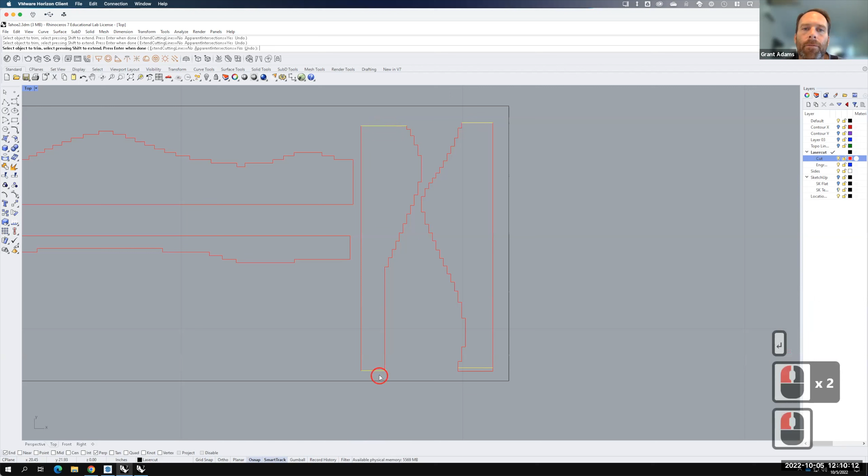There we go, and I'm going to trim off those pieces there. Then obviously those four pieces need to be put on a cutting layer. So right click over here on cut, and we'll change object layer. So now that I've done that, I have all the pieces I need to make this laser cut file.

In terms of what you're turning in, we need a screen capture showing these red and blue lines. So I'll zoom in. We could do a zoom and then a window so these fill the screen, and then we'll capture this. I'll go to capture to file, and this will save a JPEG version for me. We'll say OK, put it into my folder here, and click on save.

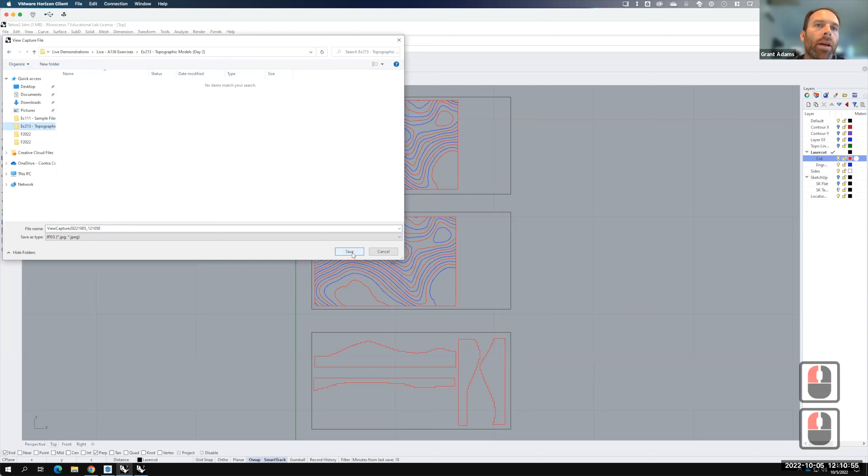That's what you'll turn in for me for exercise 213. It's also what you're going to turn in as part of your assignment 202, so I can visually see and verify, because I don't want to go in and open everybody's AutoCAD file. I want to make sure you have this and that the red and blue lines are established correctly.

Once this is done, in order to actually perform the laser cut, we want to select these objects, and we want to go to File and then Export Selected. Instead of exporting a Rhino file, we're going to export an AutoCAD file. That's what the laser cutters can read to do the cutting.

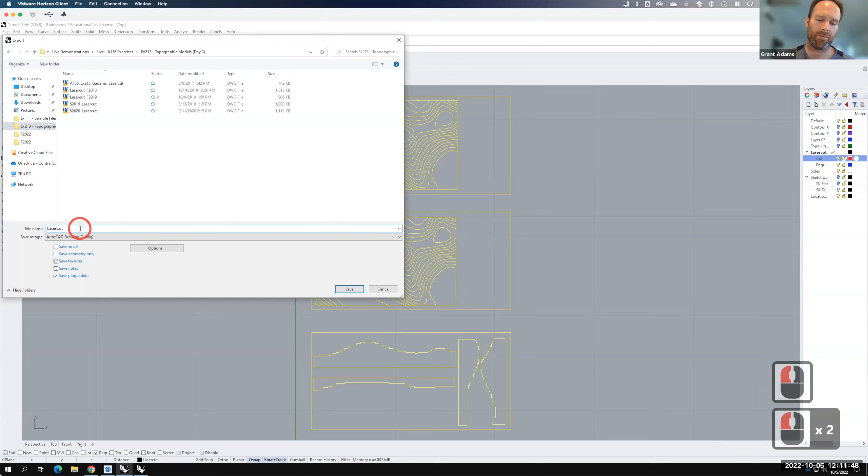So we'll export an AutoCAD file. We'll call this terrain, or, let's call it laser cut. Then we'll go into my folder for today and save this. I should probably add a folder—2022, there it is—and we'll go ahead and click save. Yeah, you had a question.

I was wondering, would this be the same process for CNC?

It's similar. The difference with CNC is that in this case, it's just a laser cut and we're cutting it out. In CNC, when we're machining something, we have to create tool paths, and rather than having, hypothetically, an infinitely thin laser cutting along the line, when you CNC something, you have a bit that has an actual thickness to it—it's not a beam of light, it's something thick. Let's say it's a quarter inch thick. You have to create what's called a tool path that tells the CNC machine whether to cut on the inside, outside, or center of the line.

So there's a bit more involved in setting up that file. With this, you could pretty much drop it in and say cut it out, and it'll cut it out for you. On a CNC file, you'd have to spend a little more time on the toolpath making sure it was cutting the way you wanted. But yes, it's very, very similar.

So I'm going to save this as an AutoCAD file. There are some options for save—I usually do the polylines, the 2007 polylines. It's pretty generic, but it should keep the lines together, which is nice when we cut them. I'll say OK there and click on save. This will create the AutoCAD file I need to be able to perform the laser cut itself.